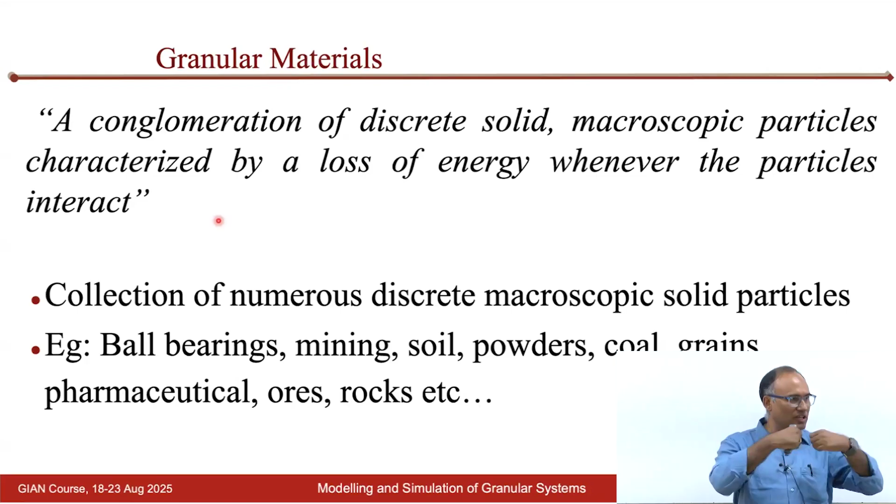When particles interact, they dissipate energy. We will discuss about it. That dissipation is the key characteristic of a granular material. Granular materials are ubiquitous, they are everywhere.

You can see the cereal, here the wheat grains that are shown. These are not tablets, but chocolates, some kind of chocolates. And here you can see the famous Mumbai suburban train, wherein people try to get in during peak hours. If you take a bird's eye view, you can see each person as a particle, and then see how this movement dynamics is happening. People have modeled these kinds of systems using a granular dynamics approach.

For example, recently we had Kumbh Mela, where millions of people visited Allahabad, Prayagraj, and the movement of these people, when there are too many people in a small confined space, shows how this movement can be accommodated. If you look at this GIF image, you would see some people putting in more effort to get in, and some people not putting any effort. You just have to stand at the right spot to get in easily. If you are not at the right spot, you experience the entire stress from the other people. If you are smart enough, you know where to stand and get in without much difficulty.

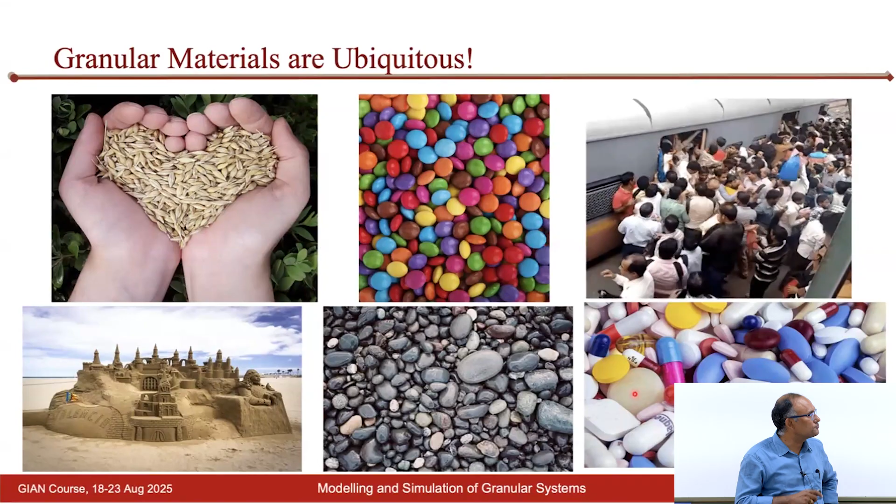Why is this interesting for us as engineers? Because granular materials are everywhere across various industries: additive manufacturing, agriculture, cement production, construction. Some of you are civil engineers dealing with concrete, soil, sand, mining, pharmaceuticals, silos, production of steel, and even thermal energy storage. Granular systems are also seen in popular lithium ion batteries. Lithium ion battery electrodes are granular materials, bound together through a binder, but the principle of granular materials is extremely useful in understanding the reliability of lithium ion batteries.

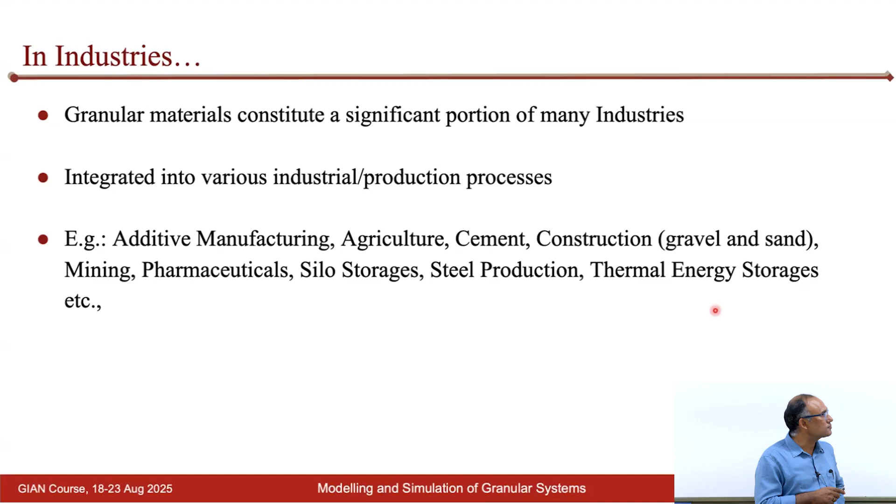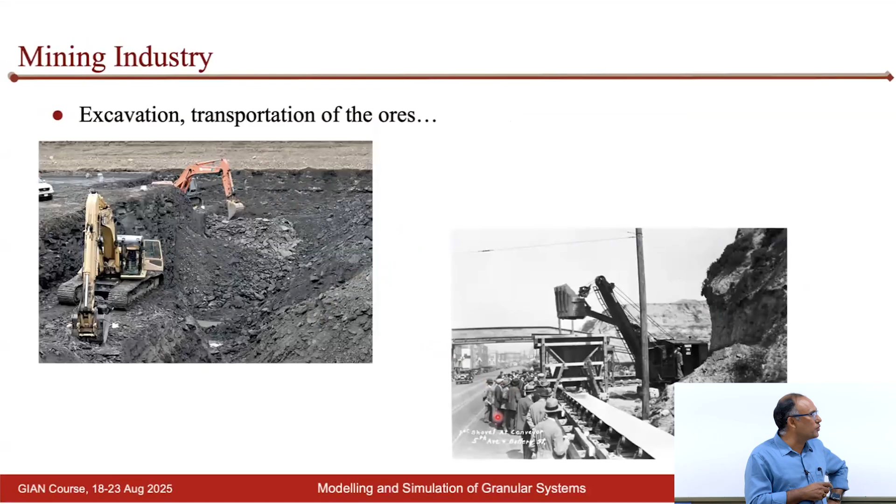If you look at the mining industry, the excavation process and transportation of coal, for example, is a granular system where you need to find the most efficient ways and means to transport it with minimal energy cost.

Here I will show you a couple of videos which show the interesting, or rather complex, behavior of granular systems. The first video I am showing here is a snow avalanche, which is a collective behavior of these particles, and how that can create havoc in a system. Let us look at that.

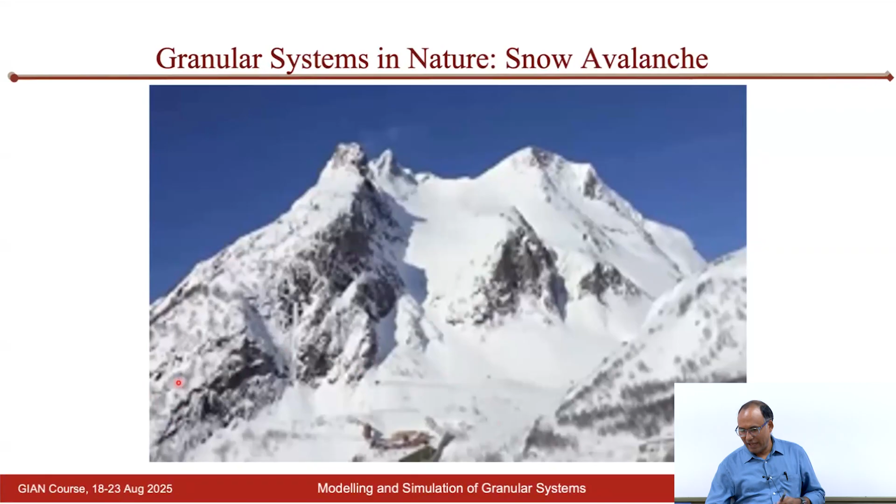You can see here, this is a ground station.

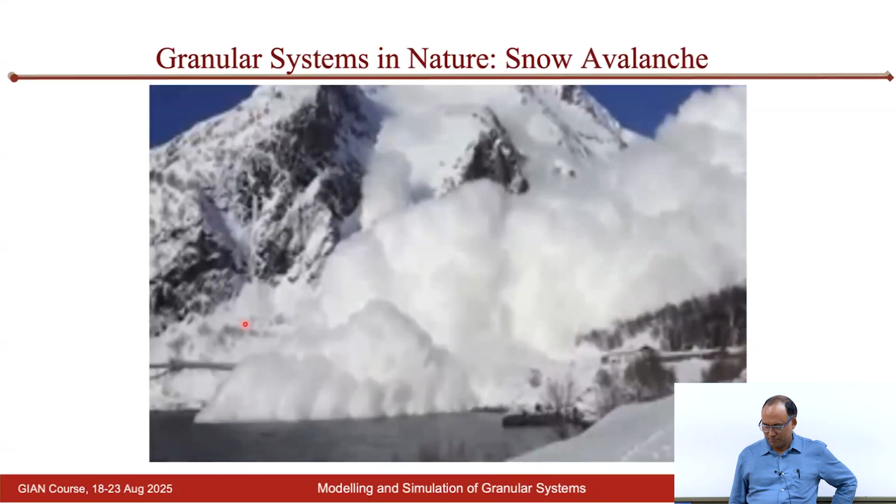The voice that we are hearing is from the other end of this lake.

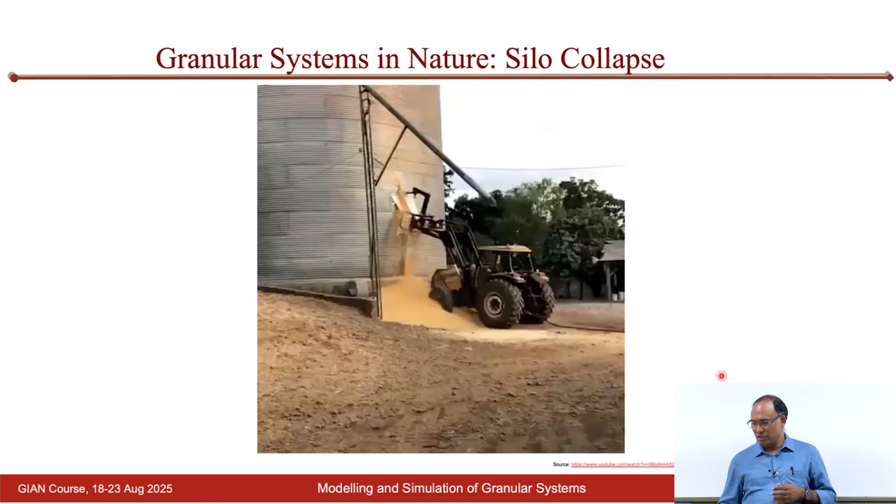Here is another example of silo storage. Let us look at this video and try to understand what is happening.

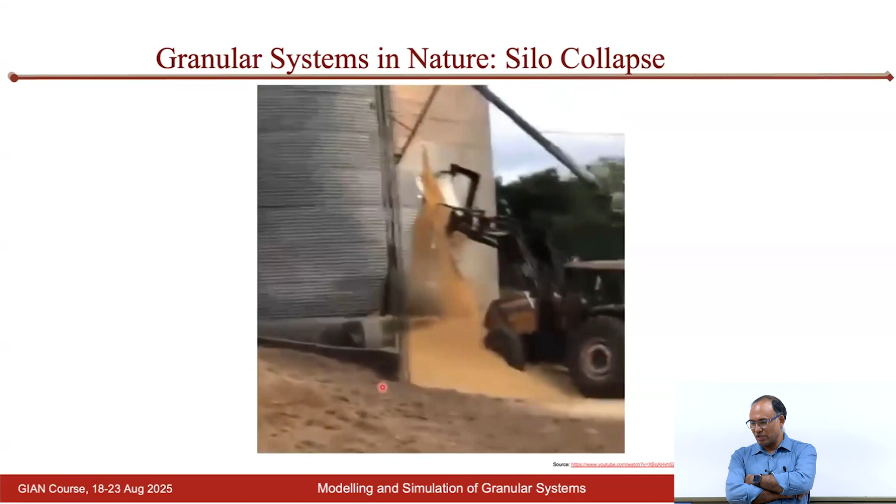Initially a small crack appeared, and the person in charge was there trying to fix it by closing it. But although it was a small crack that started, imagine the kind of load involved, a silo tens of meters in height. Suddenly the entire thing collapses, and the amount of force it exerts pushes away the truck that is there, and it could probably take several lives.

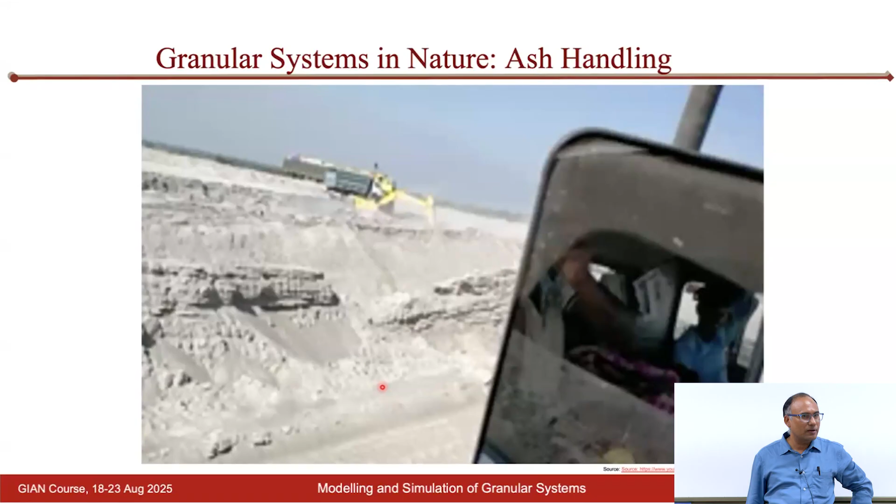Another example where one needs to handle granular systems carefully is in ash handling plants. This is typical in several power plants, thermal power plants where one needs to handle coal and ash carefully. In order to reduce pollution to the surrounding environment, one needs to understand how to reduce the transfer of these particles over large distances. This is something known to happen in various thermal power plants.

The other industry where we see the knowledge of granular systems being important is the pharmaceutical industry, where you have the need for proper mixing of APIs, binders and excipients. Unless we mix them properly, you will not get a good quality tablet out. The mixing process, although it looks pretty simple, the amount of energy consumed in mixing and ensuring homogeneous composition at any small sample is a complex problem. So people, even today, spend lots of money developing the most efficient mixers, which consume less energy but ensure uniformity in composition in a given granular system.

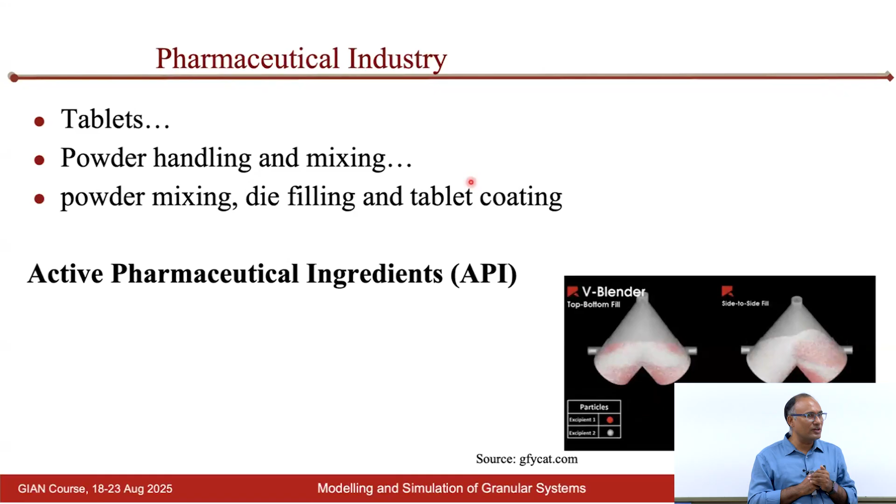Powder mixing, die filling, and tablet coating are all important problems that still need to be fixed. Whenever a tablet is made through compaction of powders, if you see a crack in the tablet, do we consume it? When we buy a tablet and see a physical crack, we don't consume it, although it hasn't lost its medicinal characteristics. It's just consumer mindset - when you see a crack, you think it's not useful. Although medicinally it hasn't lost value, for the company, having a small crack is a loss of money. So how can we develop manufacturing processes involving granular systems to reduce wastage?

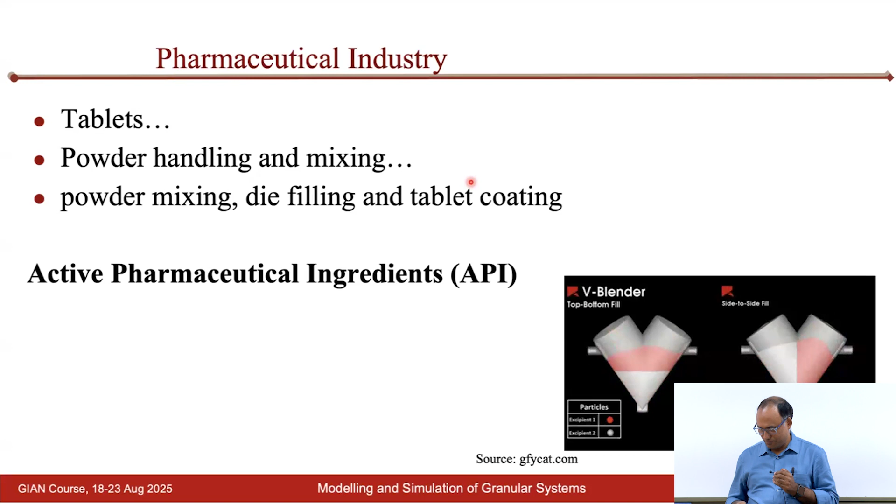Another area is the agriculture sector. We know that soil inversion is an important step in laying a new crop every season. Efficient soil inversion over large fields takes a lot of time, and the equipment we design - if we can improve the inversion efficiency of this equipment when working on different soil terrains - that helps improve productivity.

This means we need to understand the interaction between the soil and the machinery. The soil is not uniform everywhere - it has different particle size distributions, different cohesion properties, meaning the water content differs at each location. How do we improve soil inversion efficiency when the soil is interacting with the machinery? That's an interesting granular mechanics problem dealing with understanding granular properties.

At the same time, you want to enhance the life of the machine. Because there is erosion, the interaction between the granular material and steel leads to wear and tear of the machinery. How can we minimize that while getting maximum inversion efficiency? This is of interest to the agricultural industry.

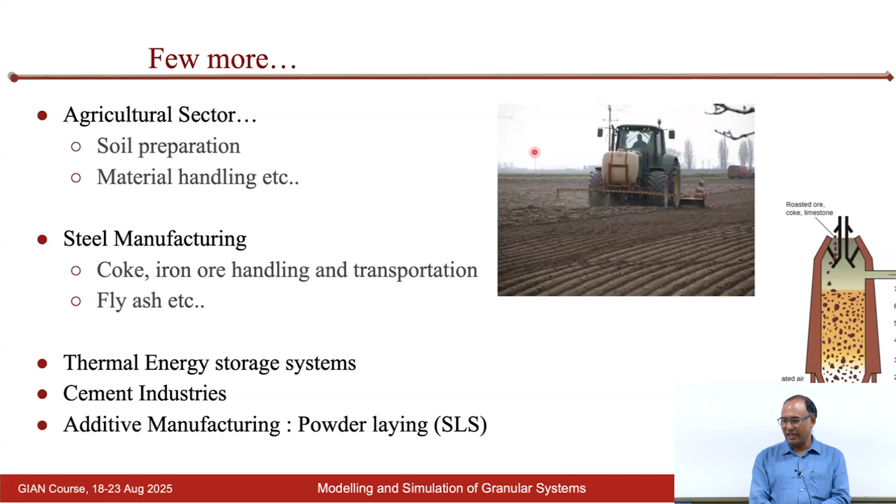As I mentioned, they are neither solids nor fully liquids. They behave somewhere intermediate. They may start behaving like liquids and suddenly show solid-like phase. Sometimes they may look like solids and suddenly behave like liquids, such as the case of a snow avalanche that we have seen, or landslides. They are solid-like, but suddenly when the right conditions meet, which are not right for us but right for it to become liquid, then the solid-like system starts behaving like liquid and you have devastation. That is the complexity involved in understanding these materials.

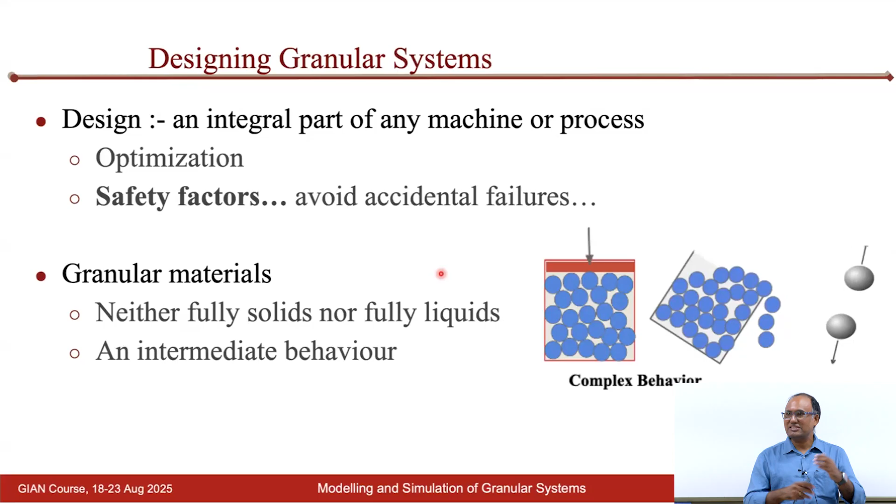So when we want to design industrial systems that involve granular materials, we need to keep this complex behavior of granular systems in mind and think about optimizing the process so as to ensure safety and efficiency. This is one interesting video that actually shows how a granular system can transition from a solid-like to a liquid-like state.

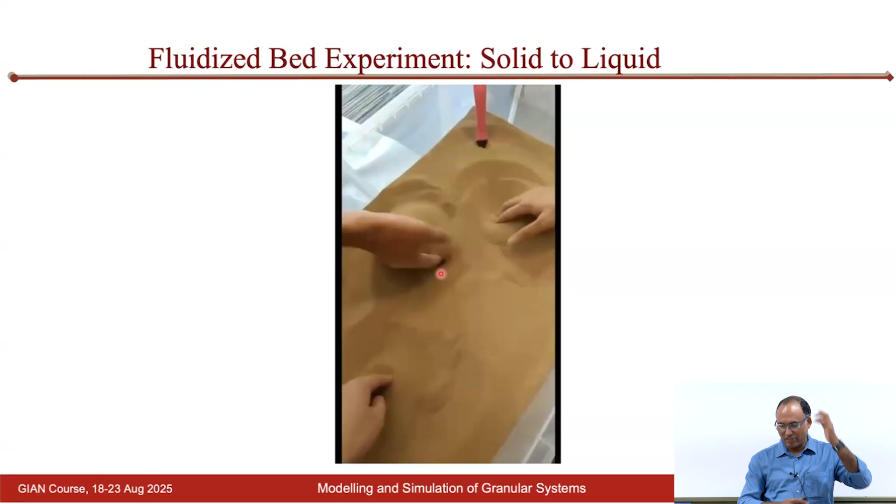Depending upon the context, depending upon the boundary conditions that the granular system is subjected to, it can change its phase from being a solid to a liquid and vice versa. The moment they stopped the vibration from the base, it simply stopped being a liquid and started behaving like a solid again. So that is one of the nice ways to show how a granular system behaves from solid state to liquid state and vice versa.

The idea is that if you apply forces at the bottom, on the top surface you have a free surface, so there is nothing that actually constrains the motion. You want to free up these particles so that there is no confinement stopping them from moving around. When you give excitation from the bottom, the force chains are disrupted, and hence on the top there is no constraint, and the particles find it easy to move around, which is what makes them behave like a liquid.

So, if you are applying force from the top, then at the bottom it is constrained again, so you may not see that behavior. But if you are applying force from the sides, you may see some variation, but at the bottom, because if you are applying force in this direction on the top surface, it is completely free.

So, when we talk about designing granular systems, we have to keep in mind their characteristics. The first and foremost characteristic is that they are discrete in nature.

I am sure a large fraction of you would have heard about continuum approximation. You use finite element method, wherein we deal with simulating the continuum behavior of the system. We actually do not talk about material having disjoint parts unless there is a crack in the material. These are called continuum materials, meaning you do not consider voids at the particle level. There are no gaps between the particles, and the particles are strongly connected. That is how a solid is defined.

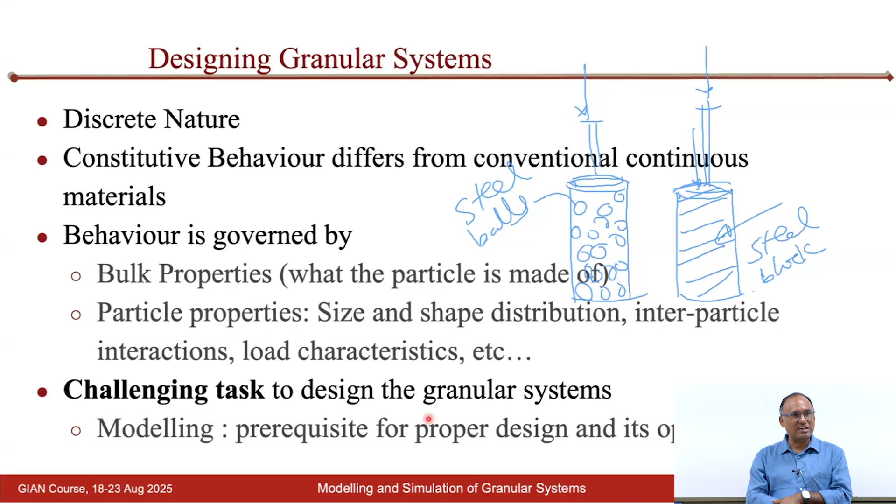What are the other areas where granular systems are important to understand? Particularly vehicle tire-soil interaction on different kinds of terrains. A lot of work goes into understanding how tires interact, because the tire itself is a complex material. Rubber is one of the most complex materials to simulate, and that interacting with another complex fellow, a granular material, depending on the terrain, can make our life hell.

So if you understand this, what is the use? Already cars are running on roads and off-road vehicles are there too. If you have a better understanding of these systems, for example, if you want to deploy a rover on Mars, you need to understand how the rover wheels interact with the soil and what the stability condition is. Depending on the soil conditions, how the vehicle can be maneuvered easily, and similar things.

So there is a lot of opportunity in the automobile industry, particularly understanding tire-soil and track-soil interactions. For tracked vehicles, large scale agricultural machinery will have tracks. How does a track interact with the soil, and can we ensure the track design gives similar efficiency when running on hard soil as well as soft soil? It is not possible, right? But can we make design interventions which ensure reasonable efficiency is guaranteed?

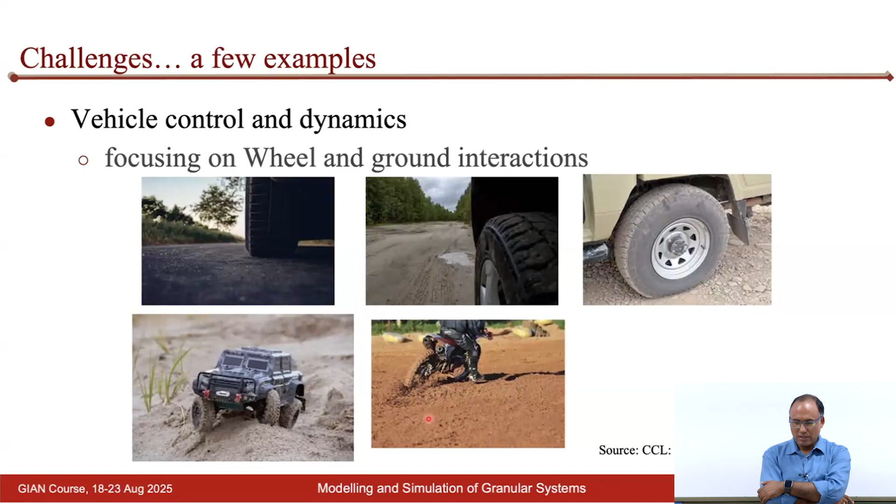Material handling is another area where a lot of work has been done and is still being done, particularly in bulk material handling, where you have to transport ore, iron ore or coal, over large distances without causing loss of material. The difficult part is that the granular materials are not of similar size, and their shapes are not nice to deal with. How can we ensure the conveyor life is enhanced while not losing material during transport? How do we design the shape and speed of flow, and ensure wear and tear is minimal? This is another area where granular materials play a significant role.

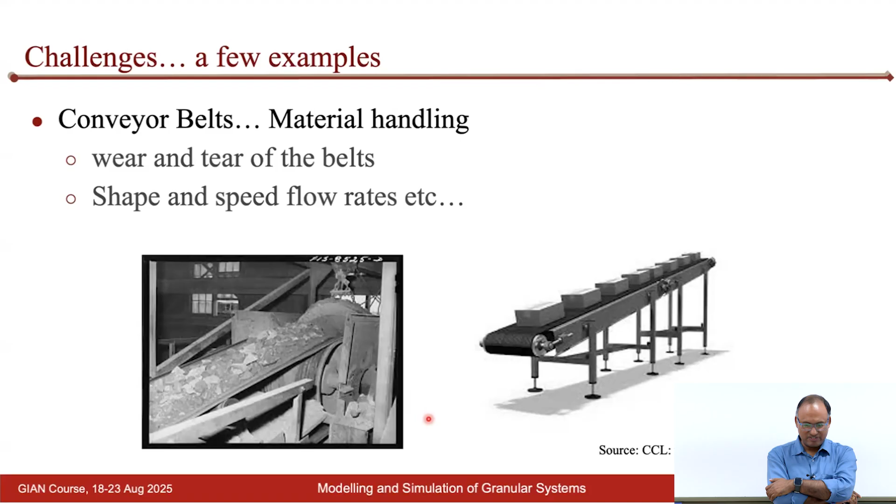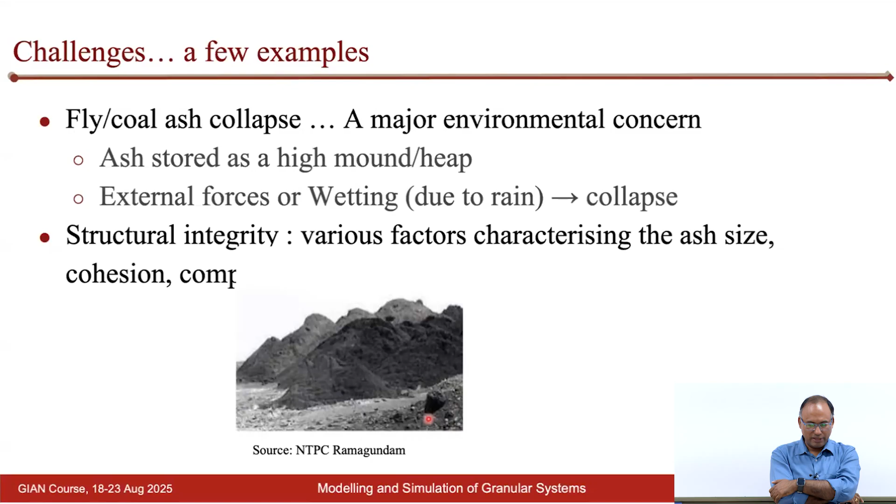Fly ash or coal pile collapse is a major concern, particularly an environmental one. Large ash piles sit in plant backyards, and we need to ensure they don't collapse. The moment they collapse, it causes several handling issues. So how do we determine what the height of this ash pile should be, and how do we ensure they are not causing environmental problems? This is another area of interest for granular material systems.

As I said, granular materials behave like liquids. Here you can see the flow through a chute or pipe going from a higher diameter to a lower diameter. Depending on the scenario, the particles can flow freely, but if you look closely, you have a popular concept called a granular arch, which actually stops the flow. Until then, the flow continues. The moment an arch like this forms, it creates a very strong force network which stops the flow, although the weight of the granular system is much larger and could have broken these forces. But these force chains are so strong that the granular flow gets stopped.

So how do we come up with mechanisms where the flow is uniform? If you are allowing particle flow through these conveyors, how do we ensure uniform flow? Where do we face this problem? For example, in a bottling plant for cereals, you need to ensure there's no clogging of the pipe through which particles flow. So how do you determine the diameter? You cannot have a very large diameter, because then you may not be able to properly pack it. The design of these systems is another interesting area.

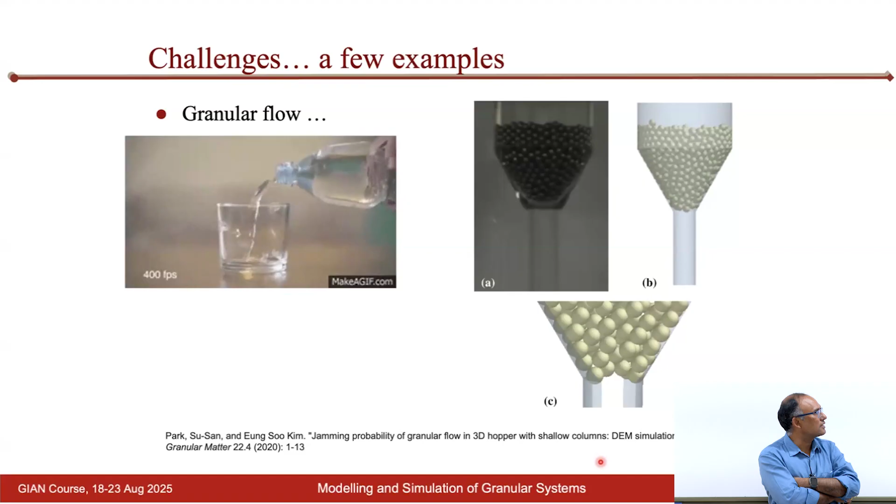So far we have only talked about particle flow and particle resisting forces, but granular materials are also extensively used in thermal energy storage for heat transfer applications. So, the understanding of heat transfer in granular systems is important.

Microscopically, each particle is in contact with several particles, and how the heat flux from one particle to another takes place depends on the contact interactions between these particles. That is an area of interest, particularly because it plays a significant role in thermal energy storage, especially for solar energy systems with phase change materials.

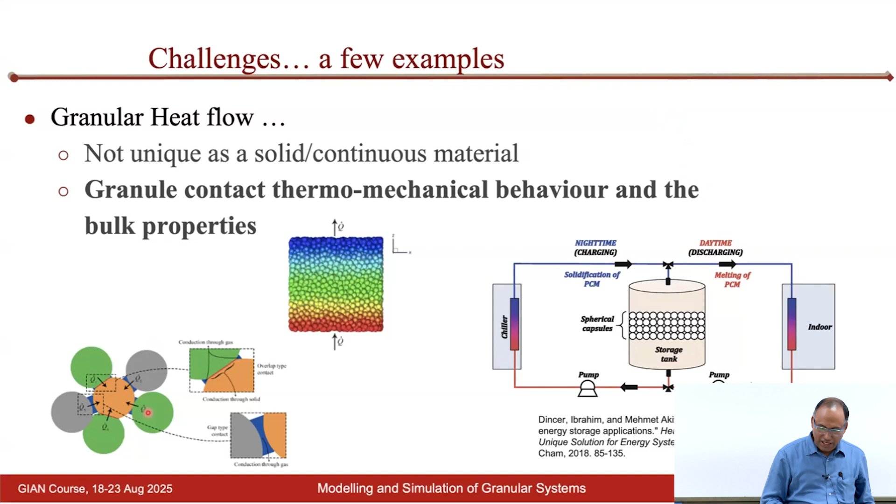If you are talking about new age materials, for example using silicon as an anode material, which is becoming popular, the volume expansion happens up to 300%. It's a huge volume change, and because the system itself is confined, it experiences very high stresses. As a result, you get mechanical failures. So you need to ensure such mechanical failures do not happen, so that the granular system behaves the way it is intended to.

So the moral of the story so far is that if you are interested in designing a granular system, or at least understanding its behavior, we should first understand that they require special treatment, unlike conventional continuous materials. A numerical approach capturing the physics of granular material is essential for design, because doing experiments lets you measure macroscopic properties, but what is happening at the individual particle level is not accessible to us.

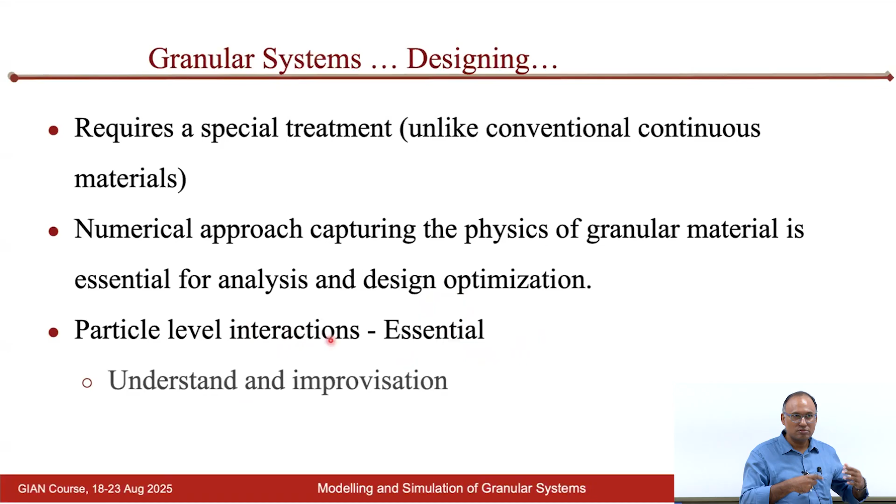Unless you have a numerical tool which allows us to understand what happens at the interparticle level, giving access to what is happening at the particle level, we cannot improve our understanding of these systems' behavior and hence the design process. So particle level interactions are essential, allowing us to understand the physics or mechanics of the system and helping us improve the design.

If your objective is mixing these granular systems, what is the objective? Mixing them properly. What do we mean by that? After completely finishing the mixing, you take any small sample, and if you look at the composition of particle A and particle B, it should be what you intended. You might want both particle A and B to be 50-50, or sometimes 70-30. So, is your mixing technique allowing you to achieve that?

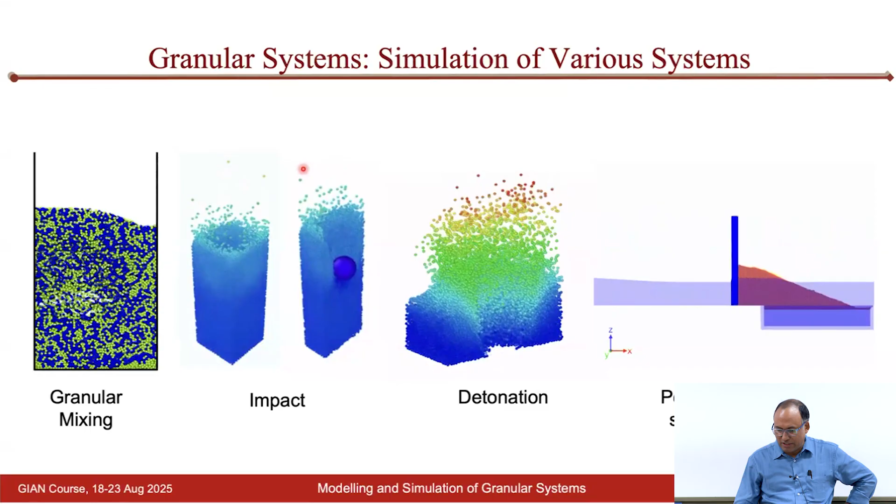Once the powders are spread, you use a laser to either melt locally or sinter the particles to make the component. This is typically what is followed in metal additive manufacturing. The quality of the product depends on how good this powder bed is, meaning the packing of particles, whether it is uniform everywhere or not, decides the quality of the final product. That is something one needs to keep in mind.

So I have just shown you a couple of examples of simulations, and the method we are going to learn in this course, which allows us to do these kinds of simulations, I have introduced. But before we actually do simulations ourselves, we need to understand the method, how this particular method called the discrete element method works, and what are the ingredients of this method. There are commercial tools able to simulate this, but we need to understand the physics behind it, what equations it solves, and so on. That is something we will look at in this class.